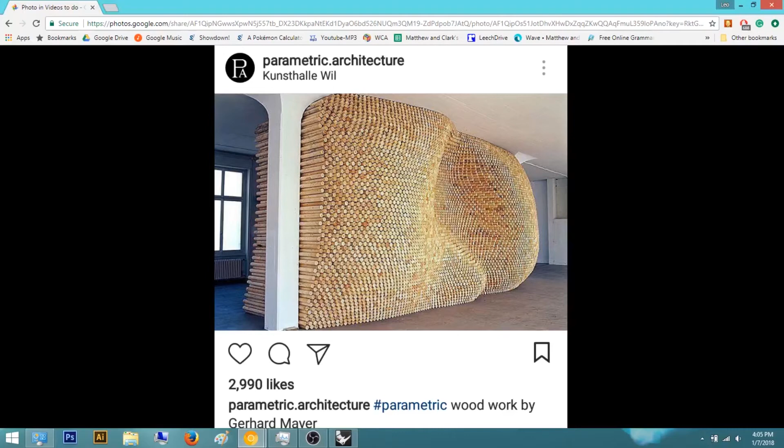Hey everyone, today we're going to do a video on this kind of parametric wall that someone's created out of these wooden poles. It's woodwork by Gerhard Mayer. Found it on this Instagram page, parametric.architecture.

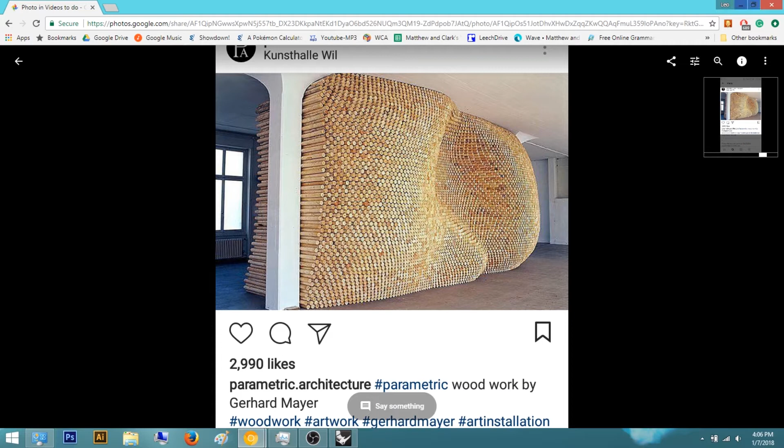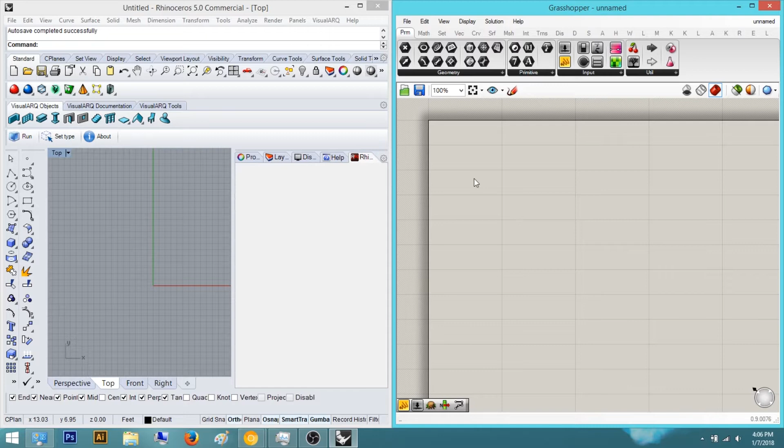I'm just going to move this to the side. I did make this a few hours ago, so I already attempted making it. I'm not going to repeat everything; I'm going to do some things a little differently because there were definitely some inefficiencies in the script that I made. So we're going to start with a square actually. I think that's the best idea.

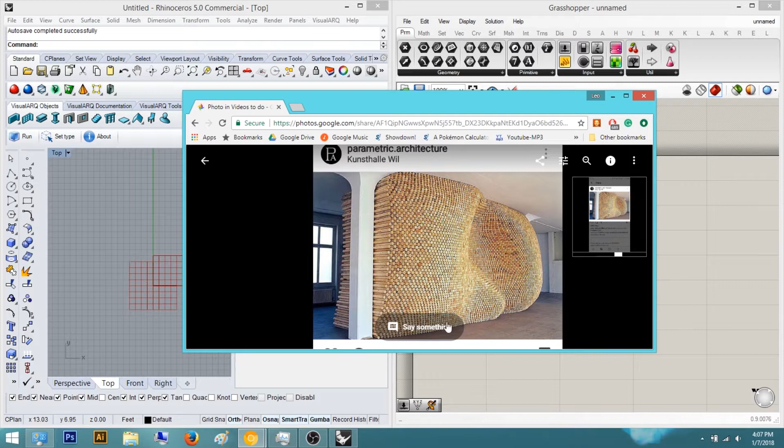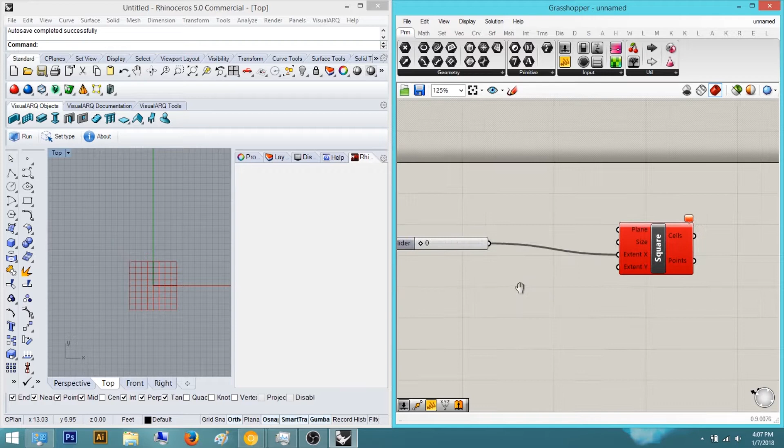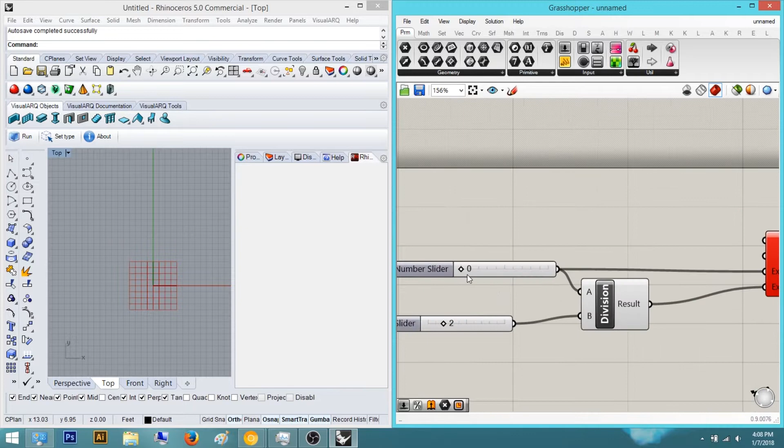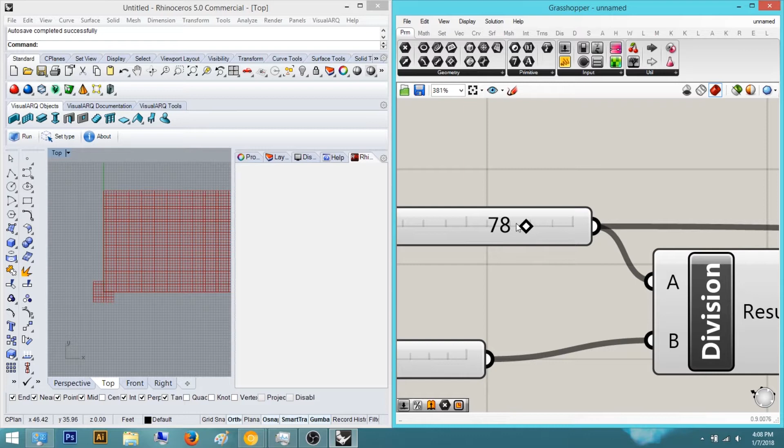That's fine. So all I do now is a division in order for this to always fit within this geometry. As you can see, it'll always be in that 1 to 2 proportion. I'm also going to keep this number even. Divide by 2. And this number has to be even as well. I'm actually going to keep it at 80. 80 is a good number, and that will create a steady amount of points.

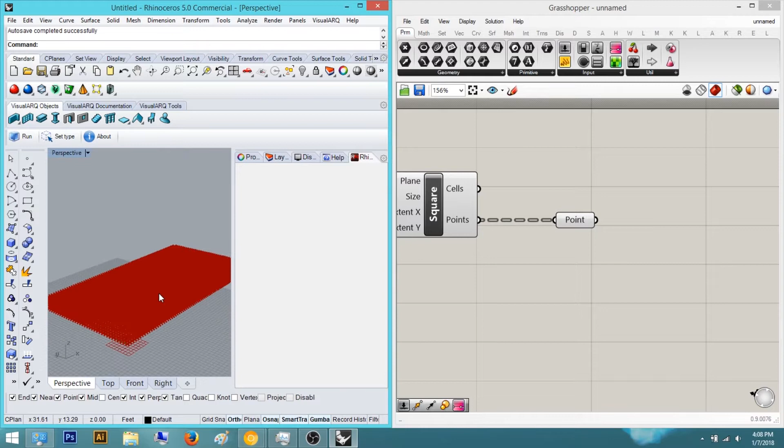So we can now type in points, and this will create a field of points. There already was a field of points, but now it's highlighted. So what we're going to do now is basically an attractor point. I know that I need to create at least 4 attractor points: one here, one here, one here, and one here. I'm going to start with this one, the one going in the negative direction in the XY coordinate.

So we'll just type in move. This is basically the attractor point lesson. Also, I learned that if you want to move something, you just hold Alt and click, and it'll separate it, which is pretty cool. So if I wanted more room here, I would do that. I want to move in the Z direction. I keep forgetting that I don't need to move it back, but I always do that out of habit. Then we're going to do a remap numbers.

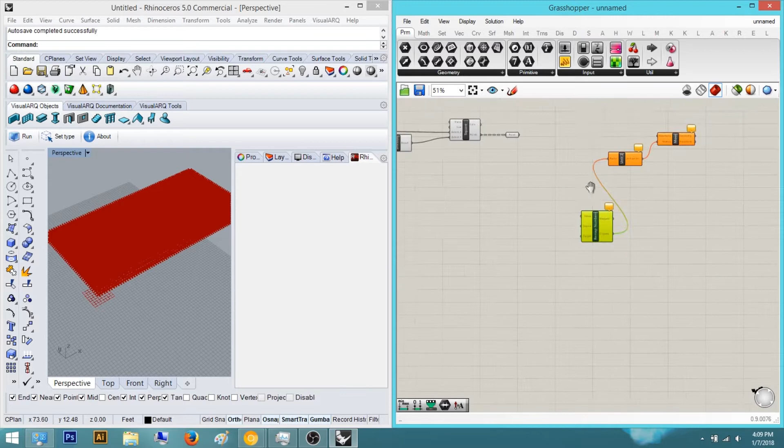I don't know why every time I'm about to record, I always have to clear my throat. It's really annoying. Obviously, I talk a lot.

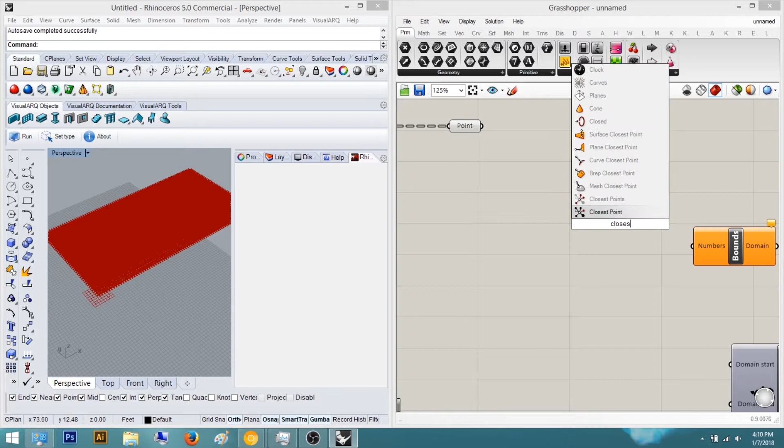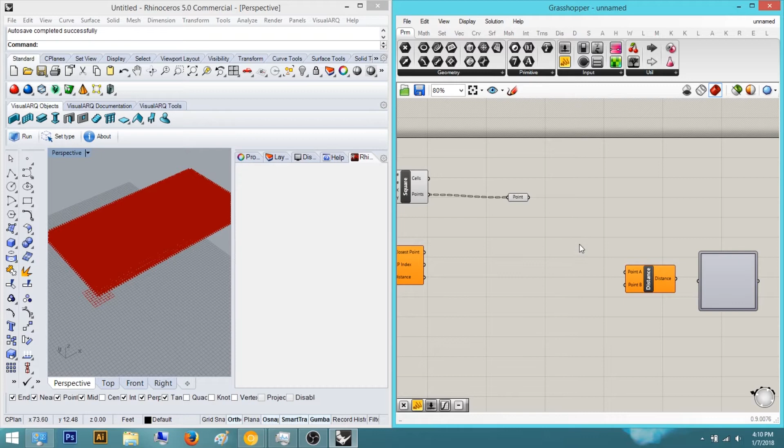So after you do remap numbers, just do the usual construct domain. Plug this in here, and do bounds. And then instead of closest point, we're actually going to use distance instead. But before we plug these in, in between these is going to be a graph mapper. We're actually going to utilize the graph mapper today since it will help us determine the intensity of the manipulation of the points. And you'll see what I mean in a second.

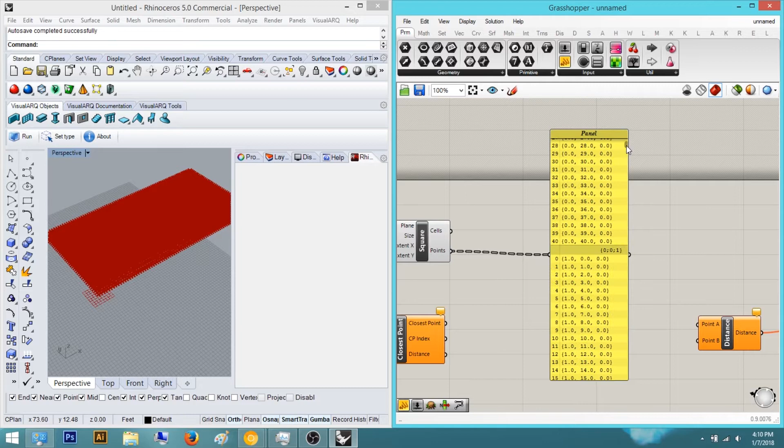So you just plug this in, and we just plug these two values in here, and it looks like that. Now if we throw a panel on here, you can see it has their own branches. So we want to flatten that so it doesn't redo the same command every time. So we're going to do a flatten here, and we're going to plug this into A. And then we're going to type in point here. Not point line, do point.

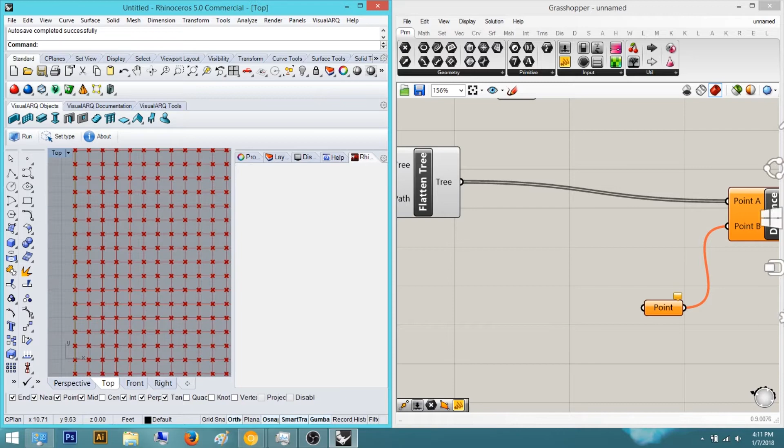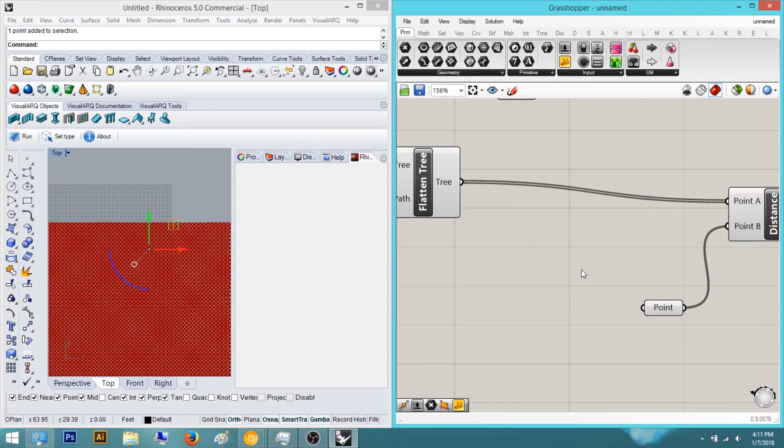And now we know that it's about here, so I'd say around, let me look at that picture again, somewhere here. So I'm just going to guesstimate exactly where it's at. So I go to point, have my point, and set 1 point, sweet. And now all I have to do is use this flattened point geometry. Actually, I'm going to hide this because I don't need it. And then plug it into geometry, and we'll see what it does.

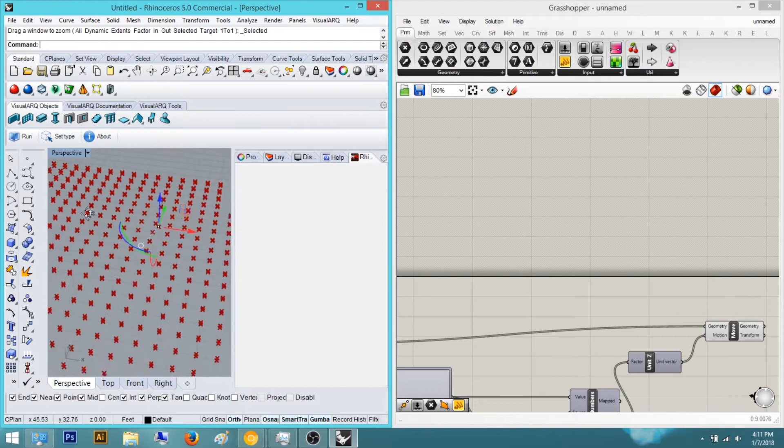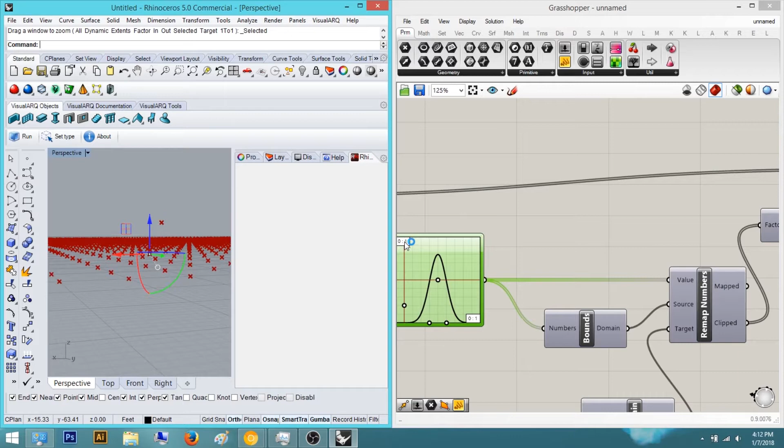Alright, so it looks like nothing is happening. Okay, it's lifted up a tiny bit. There is some difference, but there is no graph, so that's already a problem. We're going to use the Gaussian graph because that's kind of the articulation that's happening here. It has that little kind of hump going on here, or hill. I don't know how else to call it. So it is working because there is 1 point moving. Right now it's at a 1-to-1 scale, so of course it's only going to move 1 point.

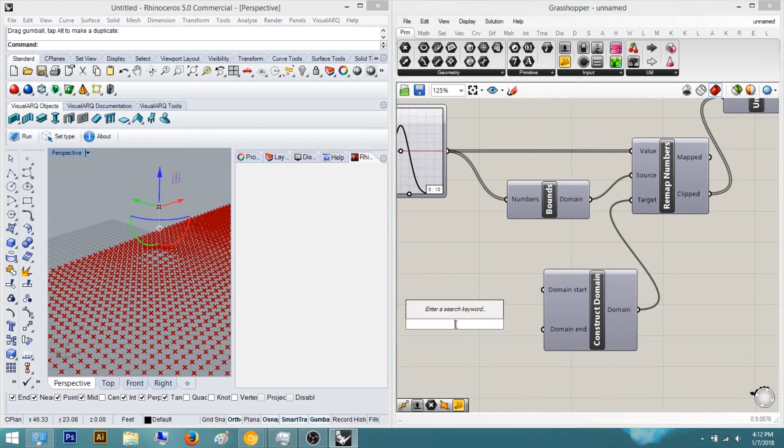So let's just try 10 and see how that works out. And 10 seems to be pretty nice. I think 10 is a good number for these things. Oh, I didn't do up. That's what I want to do. So right now the domain is only up to 1 at its highest. So I'm going to change that to be 0, just for the sake of understanding that, and do a negative here because I want it to recess into that piece. And I'm going to do 7. Let's try that.

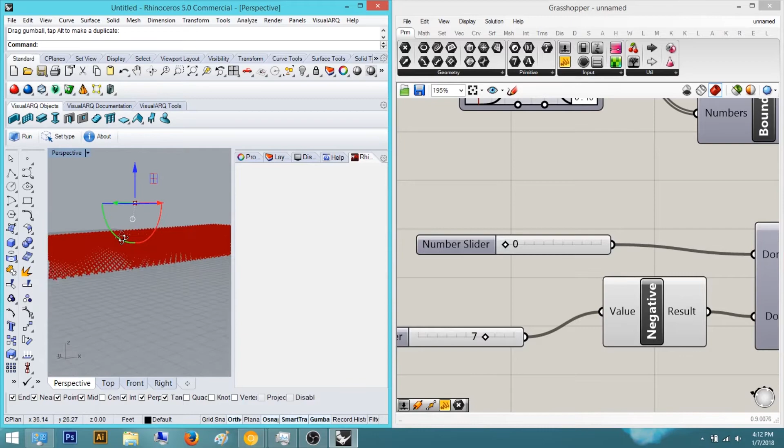Okay, so that's kind of the depth I want, but it's way too sharp. As you can see, it just falls right into that kind of pit. So let's actually start to widen that out. Let's go here and a little bit here. As you can see, in this one, it has it kind of going out. Of course, there is a little divot here, so I'm actually going to move it a little bit, and that's definitely something I'm looking for. Awesome. A little more. Yeah, a little bit back. All right, cool. That's definitely something I'm looking for right here.

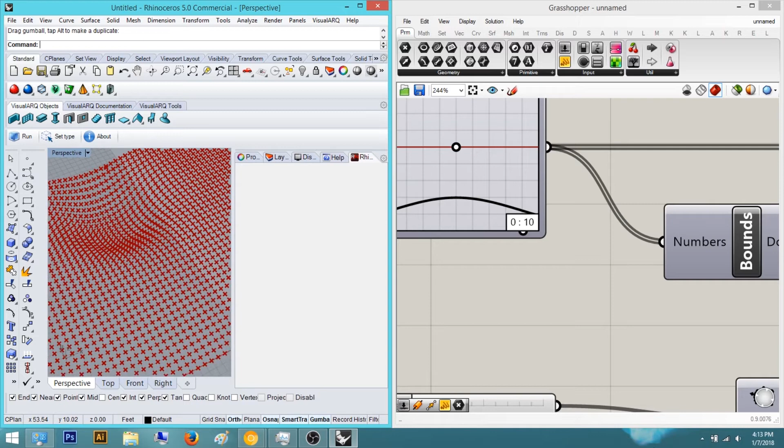And then, where's my image at? So I need that to kind of wind up. Okay, this is a pretty good start. I want to expand it a little bit. I don't want it to be just 10, so I'm going to change it to 15 actually. It'll widen out a little bit, and now I can actually move it back a little bit. There we go, something like that. All right, cool. Because this is going to be the biggest type of articulation. Maybe not that wide.

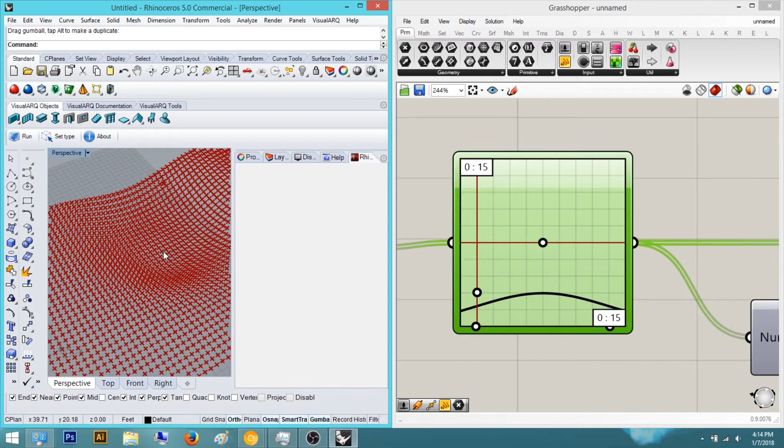It looks pretty deep in here. I'm trying to make it somewhat accurate to this. So now once we have that, I'm going to actually create these 3 points. These 3 points are positive, kind of pulling up the points instead of pushing down the points. And this seems to be good. All right, cool. So let's start with the next ones.

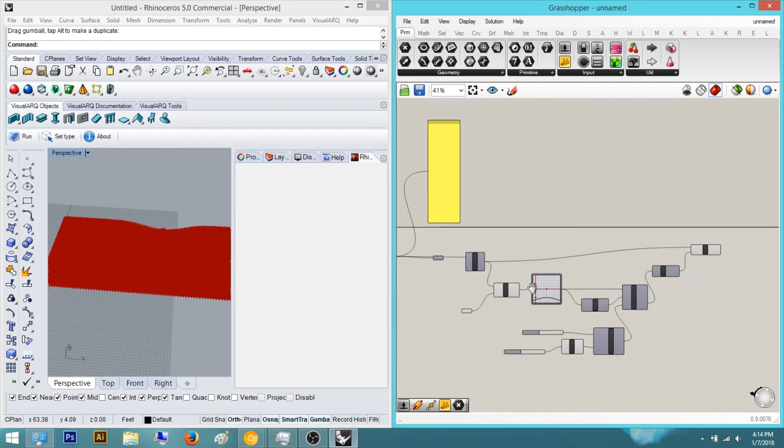And if you're learning, I'd recommend typing it all. So for the second one, I'm actually going to type it all instead of copying and pasting. But for the other 3 that are left, I am going to copy and paste. So I'm going to redo that. I'm just going to do a move. I'm actually going to hide this because I know what it does. Hide. We'll just do Z direction because that's the direction we want in.

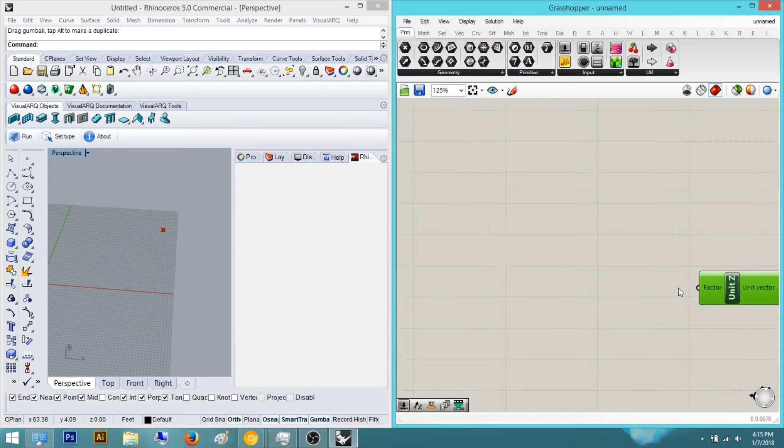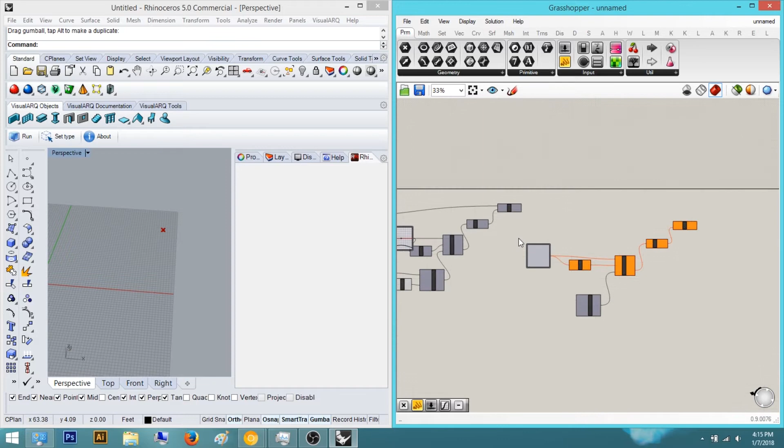We'll do a remap numbers. I'm just going to quickly go over it since we already went over it. Construct domain. Bounds. We'll do, not construct domain, what is it called? Graph mapper. Put these bad boys in. I always have a hard time grabbing onto these for some reason. We'll just expand this out. Well, not that much, probably just a little bit. And then we'll do a distance.

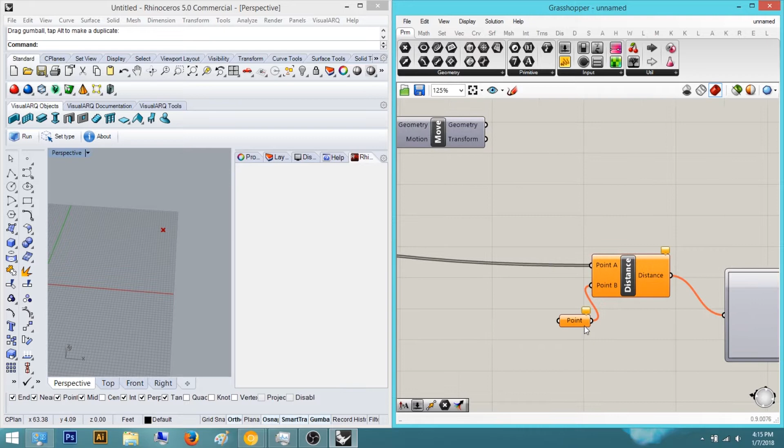And again, when we do the distance, point A is going to be the exact same. So whatever this point A is at is going to be on this flattened tree. And then we're going to do point. And now we know that this is going to be 0 and this is going to be 7 or something like that. It doesn't have to be exactly 7. And we know the graph that we want is a type of Gaussian graph. It's leaking onto my second screen. So Gaussian. And now we can do top.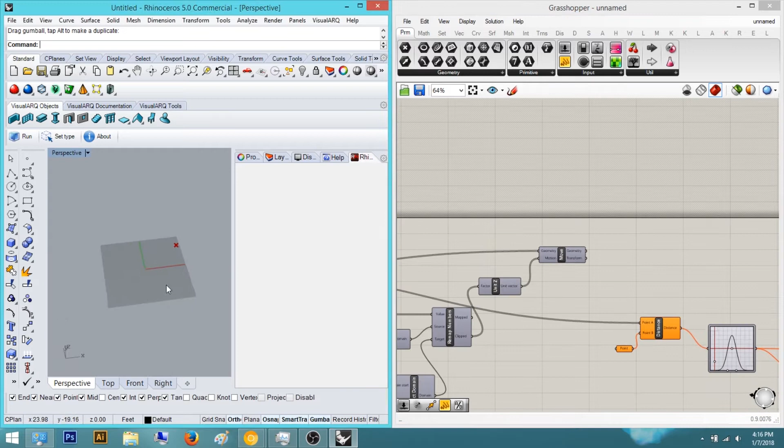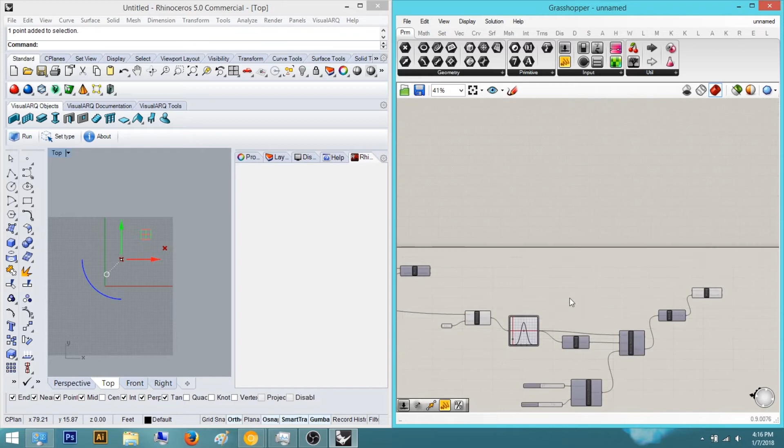And I know it's somewhere around here. Let me turn this back on again. Yeah, it's somewhere around here. So I'm going to put that. And now I can see my point, and I'm going to right click, set one point, and now we have our point done. Alright, so all we have to do now is just plug this in. Nice. And as you can see, it is working to an extent. It's only moving that 1 point, or 2 points. It's not moving that much. So we can set this to 10 again, instead of 15, like I've been doing. So let's try that out.

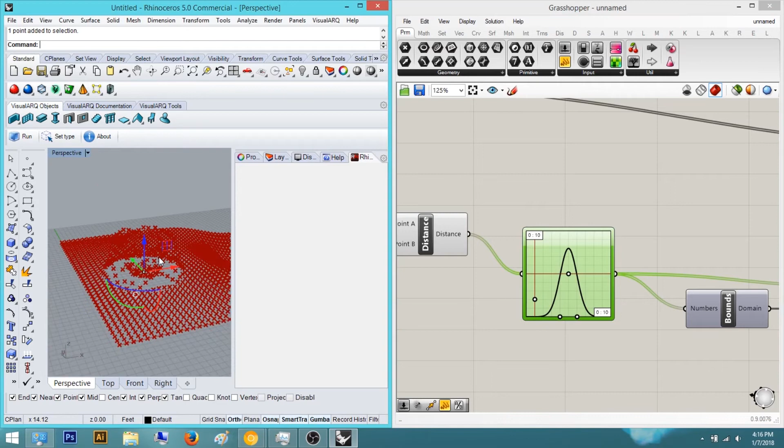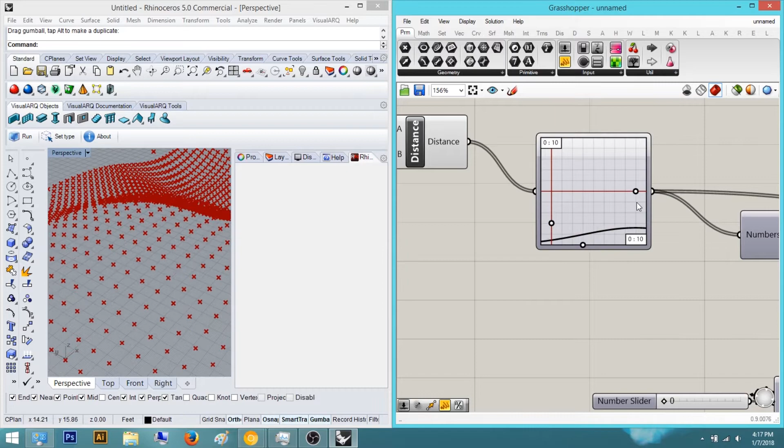Okay. Awesome. So now we can actually start to articulate these points. Let me see what these look like. It's a very slight bump, so I'm definitely not going to make it this severe. I'm just going to move it around a little bit. Sorry, it's a little hard to see with all of these points here, so I'm just trying to find the easiest way to do this. That's a little high up. I don't want it that high. I want it really light, so I'm going to go over the boundaries and do something like 25.

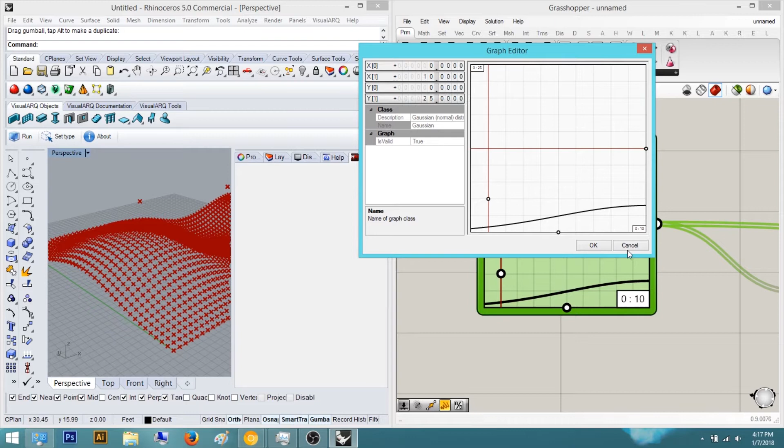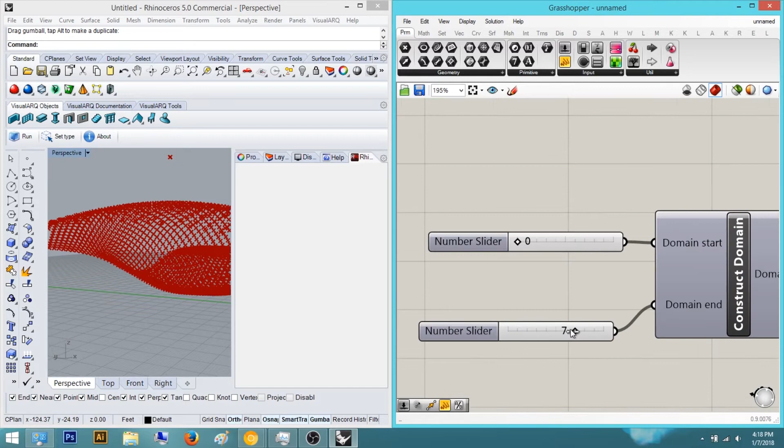Wait, what direction is this in? The X direction. I want it in the Y direction to be very subtle, so I'm going to do 25 on the Y direction. Let me change the other one too. Okay, that actually seems to work. Just very slight, but I'm also going to lower the movement of the points to not be so high up. I just want it to be very subtle. Nothing too severe. There we go. Something like that. That seems to work out quite well. Alright. So now we have to do the next point.

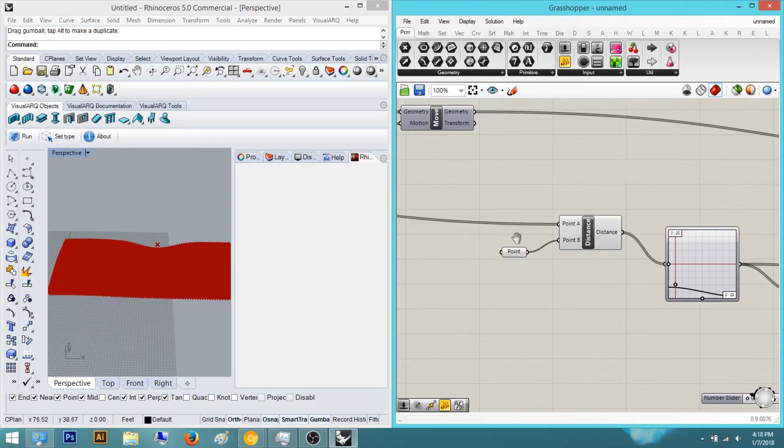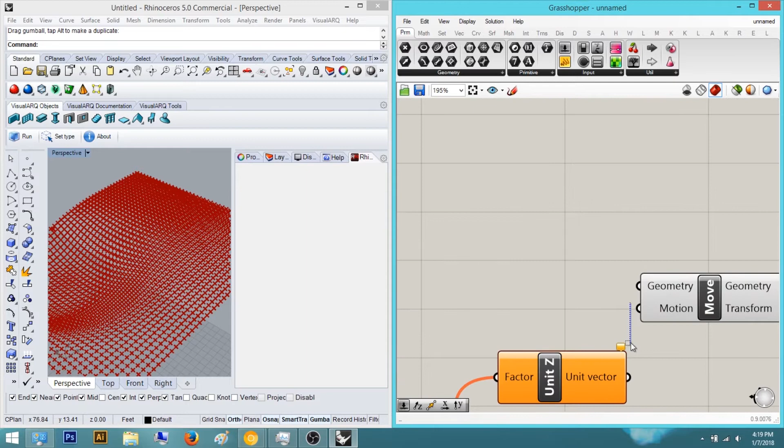We have 2 points done, and we need to do this one right here, and this one right here. So all I do is copy, Control C, V, copy and paste this, and I'm going to delete that point. And I'm also going to copy and paste this one. And do a move. I'm just going to plug in a move to each one already, to the motion. And I'm going to align these moves up. Boom. Awesome, now they're all aligned. You see the script is getting quite long, but it's not going to get much longer than this. So we'll type in point,

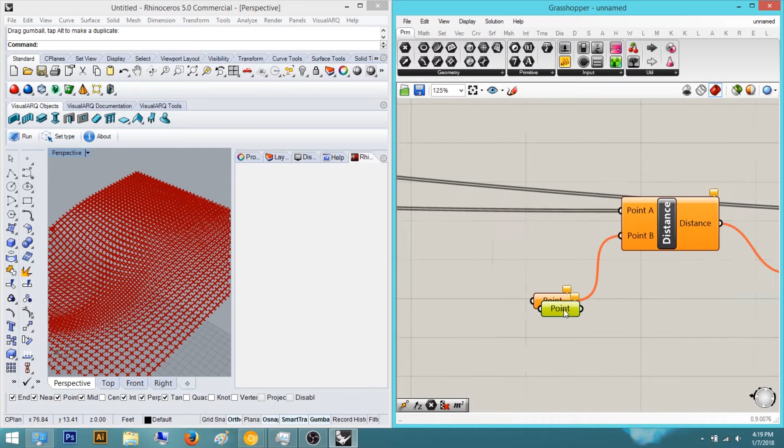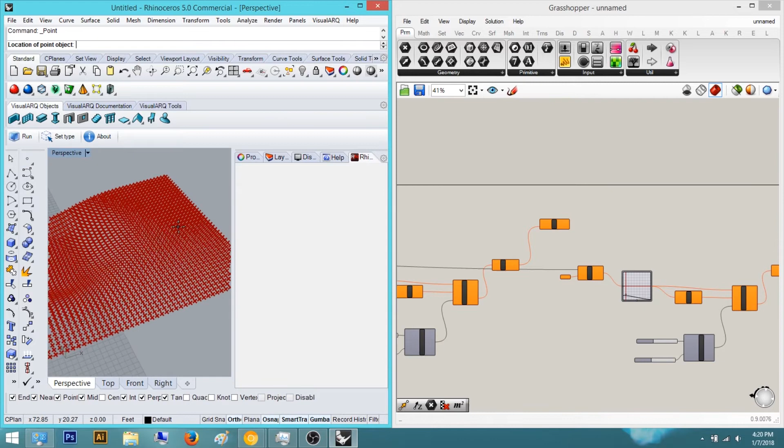and then we'll move this one here. And then all we're going to do now is just use probably here. I'm going to make it exactly parallel with this, so I'm going to do a move command in Rhino and line it up exactly with that. And then somewhere here. So we're going to start with this one. Where is my graph at? It is right here. And I'm not going to make it all the way here, so this is not going to be 25, it's only going to be 10. You only need that much, you don't need large numbers. 10.

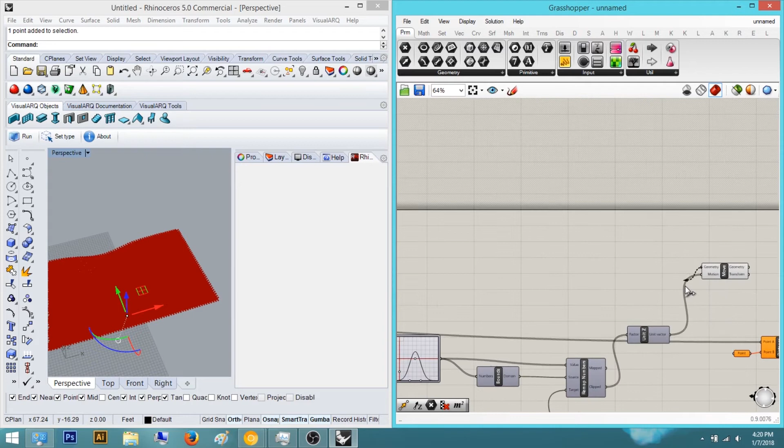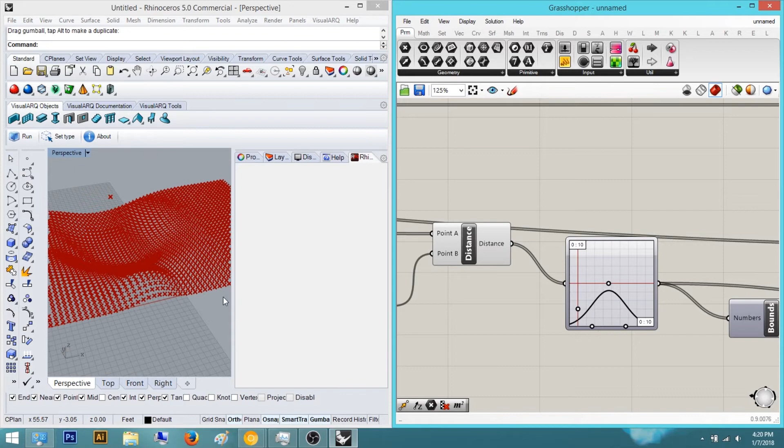Awesome. So now we have that type of sharp geometry going on. I want it a little bit more severe actually. So I'm actually going to do something like that, but turn up the height, something like that. Yep. All right, and it should match something along the lines of that. Cool. All right, it's doing it quite well.

Sorry if you hear all my click noise. This is just how I model. I know a lot of people don't like it, but that's the nature of modeling in general.

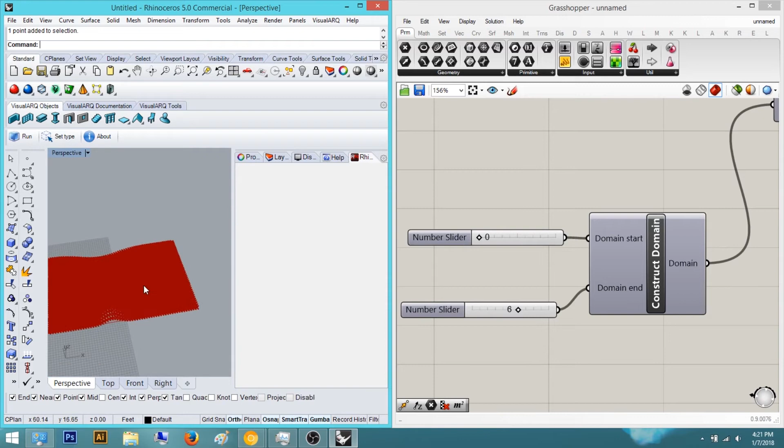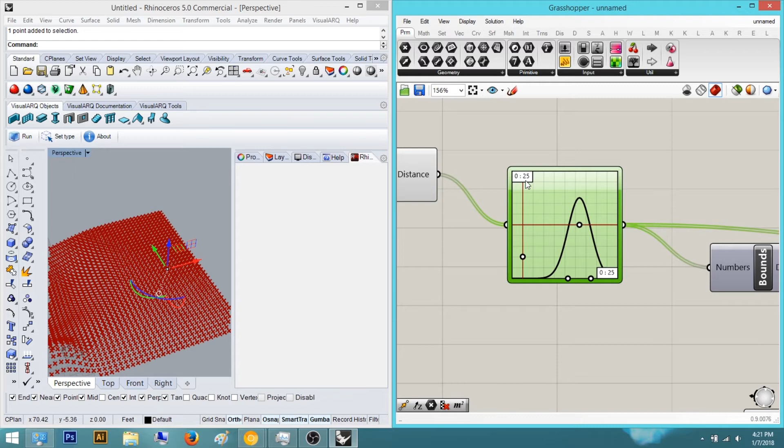So this last point, I'm going to set one point here, and then kind of move this back here. Now I only want this direction to be affected, which is the y direction. So I'm going to keep the y direction at 25, but I'm going to go back and put this at 10, so it only affects a rectangular area. And now all we have to do is plug this in and hide this.

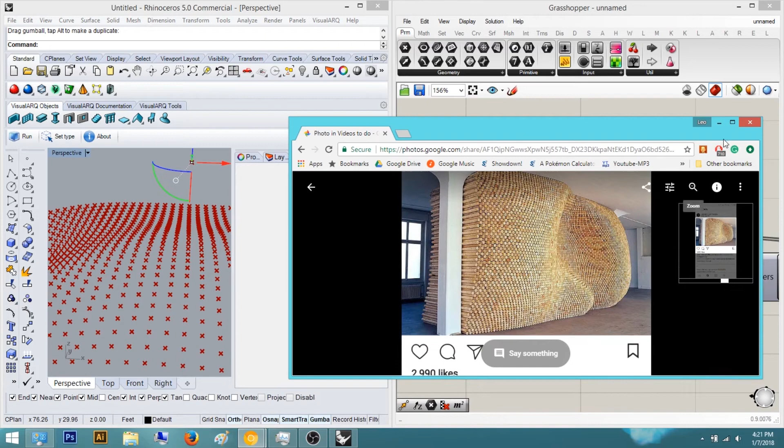Alright, and now we're going to do what we did with that other one and sort of flatten that out. But it seems to be a bit more severe than that from what I've seen. Like right here, it's very bulged out. So I'm definitely changing the parameters of this to be a little bit bigger. Let me see if I can actually start to move this down. That actually sags it versus that.

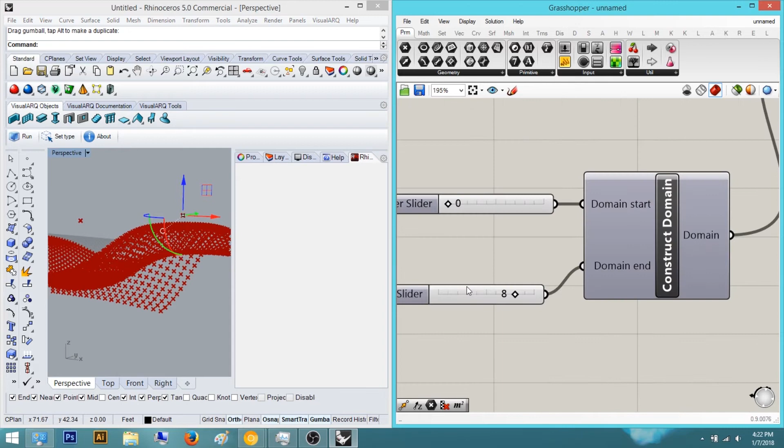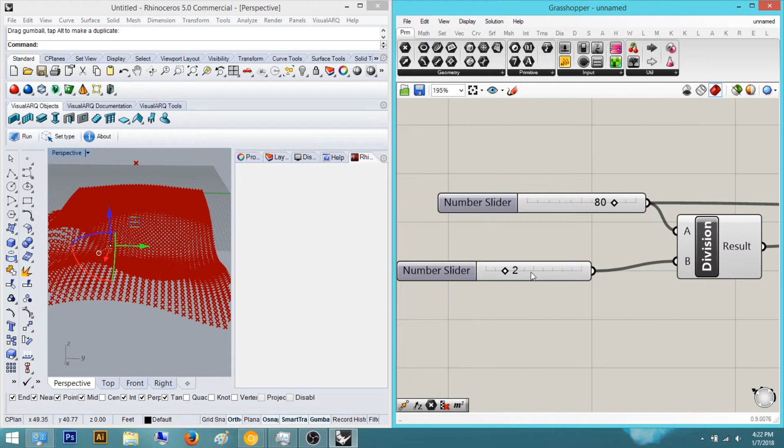Maybe not that high. I'm actually going to use rational to get a more accurate way of doing it. Yep, that looks really good. All right, nice. I want to capture more of the 25, so let's say 50. Actually, how much is in the y direction? 40. Not this one.

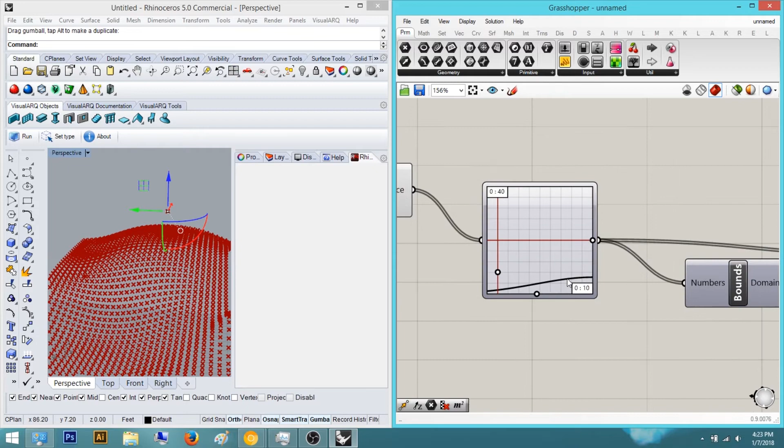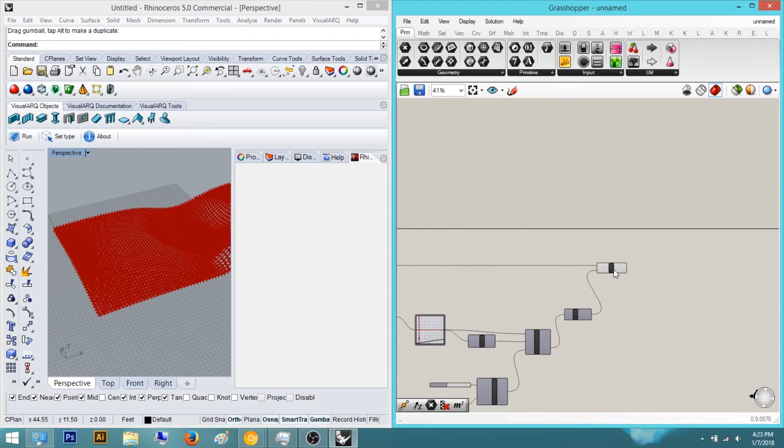I need this to extend out a little bit more, but I think this is really good for what I have right now. It's pretty accurate in terms of the shape. So now we have the form with the amount of points done. We manipulate the geometry by using points. Once you have that, we can start to make the poles. And the way to create that checkered pattern is like we did in the parametric brick wall. We can do a cull pattern.

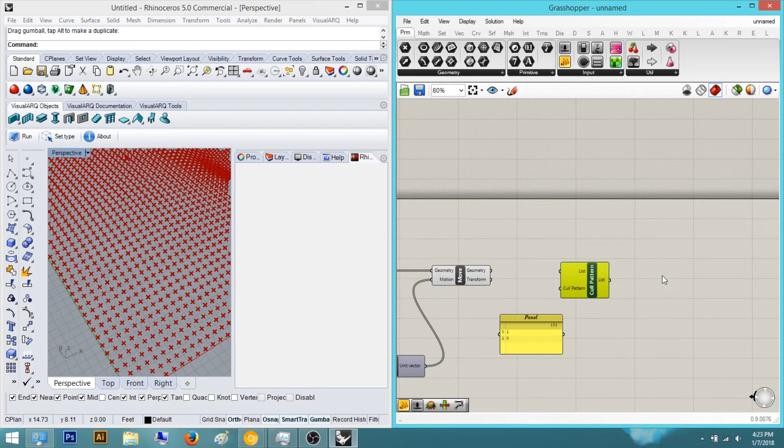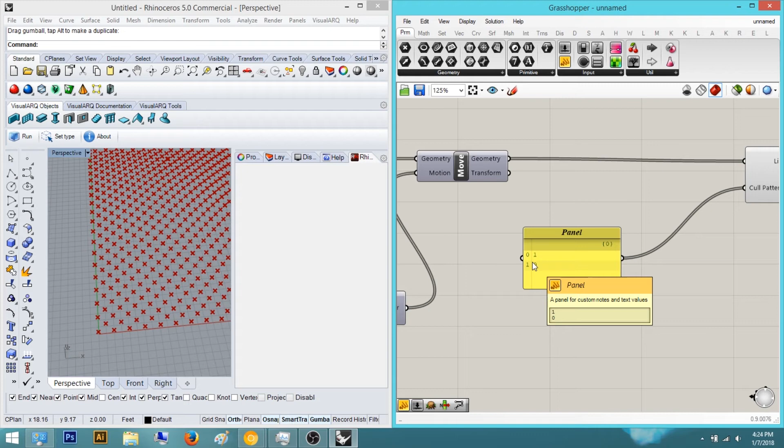Panel, double click, 1, 0, press OK, multi-line data, list, and hide this. And as you see, we have our checkerboard list manipulation happening. If you don't understand what 1 and 0 is, you need to go back to a list manipulation tutorial, not necessarily mine, but someone else's as well, if that helps you out. But as a brief overview, 1 is true and 0 is false. So 1, 0, 1, 0.

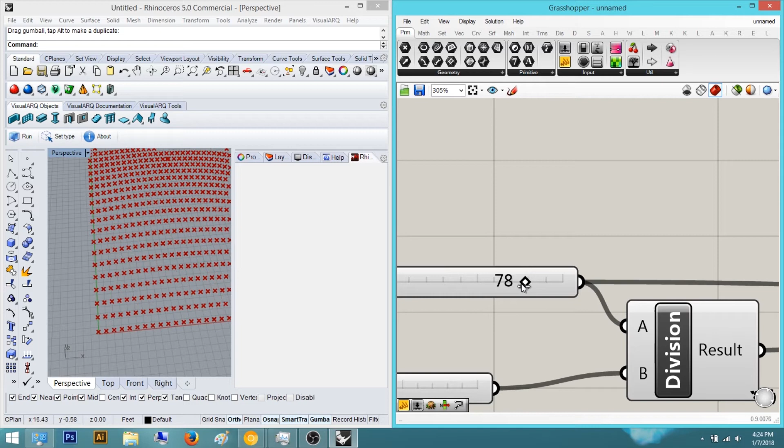And the reason why I kept this at an even number is because this needs to be even always, and so does y, in order to create that checkered pattern, because of the listing. If it lists in odd numbers, it'll just show lines of geometry, and I'll show you that right now. So 78 is an even number, but 78 divided by 2 is 39, so it creates an odd number here, and you have these lines instead. So we're going to do 80, awesome.

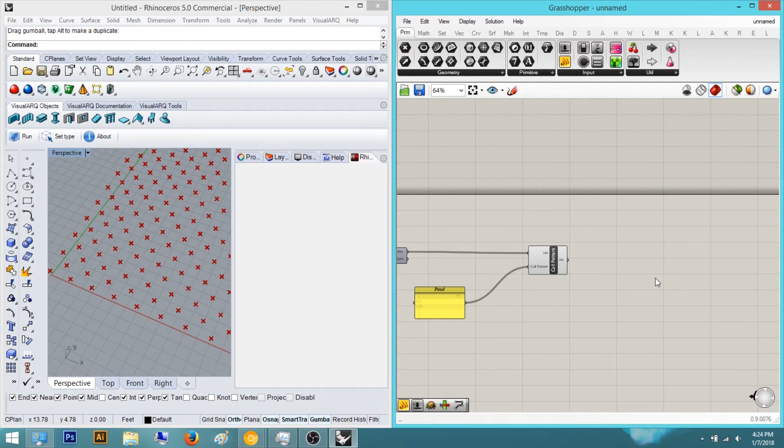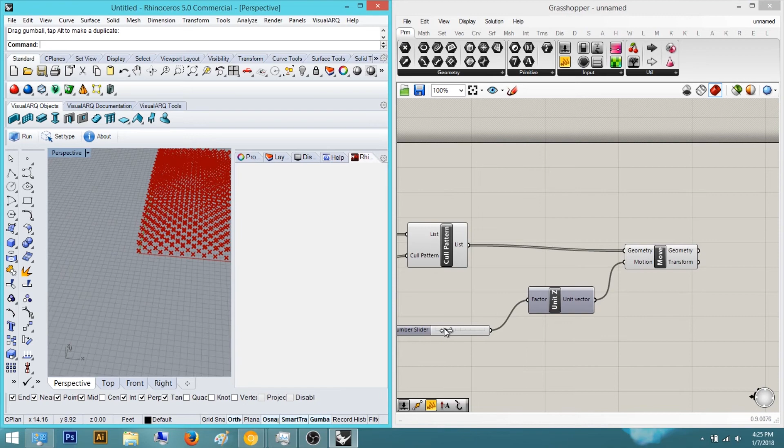Alright, so now that we have that, I'm actually going to move this in the Z direction, and I'm just going to plug in a slider into the Z. Awesome. So now we can actually start to manipulate the geometry on how it's moved. So I'm going to say all the way to 10. And that should be good.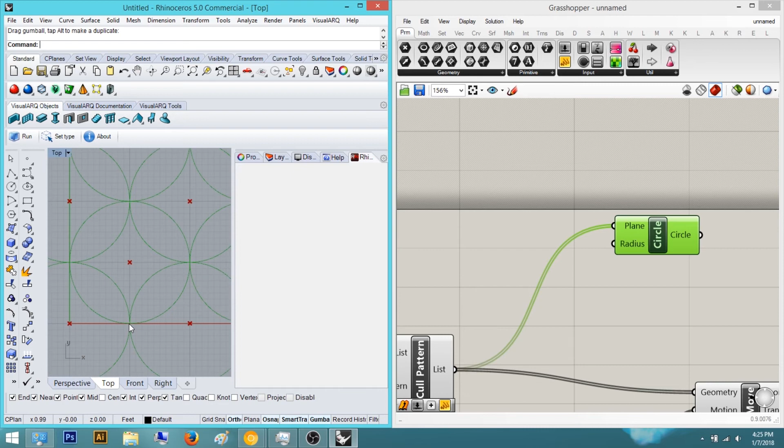Sweet. Once we have that, we're going to now go back to this cull pattern and make circles now, which will serve as our metal poles. Now in top view, you see that they're intersecting a little bit. Here they're intersecting. Okay, let me think. If this reaches that, this reaches that perfectly. Let's try 0.5.

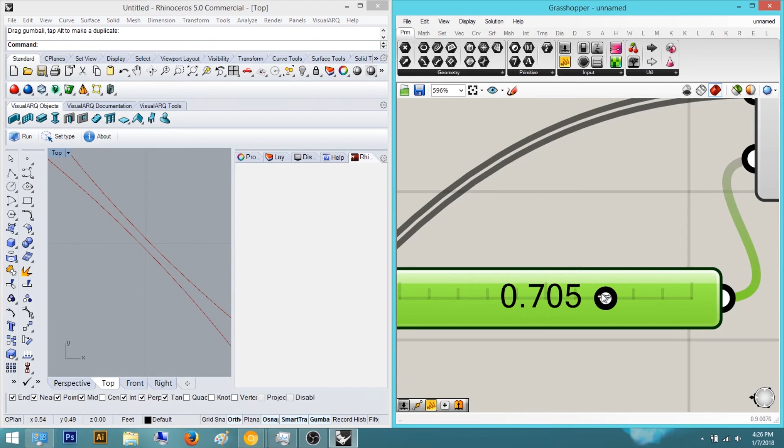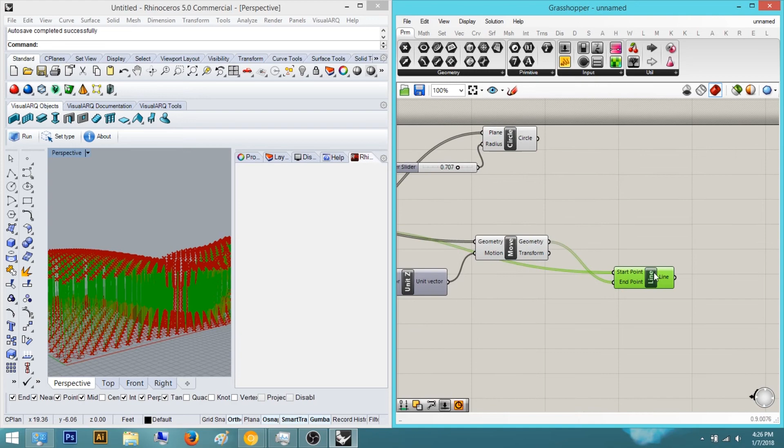So we have our cull pattern, bottom. So this will be our start point versus our end point. And you can see we have an array of lines. Oh no. Alright, so now we have an array of lines. We can actually start to create the poles now, which we have with the circles.

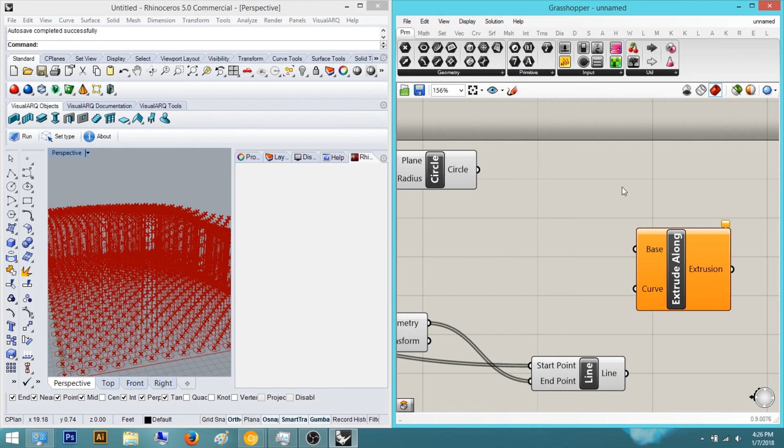And we can actually use something we never used before in this tutorial, which will be the extrude along component. So this extrude along component is basically how we can show our points. So how we can extrude the exact distance of these lines. So these lines have a certain distance, right? It's exactly 10 feet actually, but it's 10 feet in a direction of these lines.

So it's not starting from like a flat area. So it's not like attractor point based. The extrusions are not attractor point based. It's more of the movement of the points that are attractor point based.

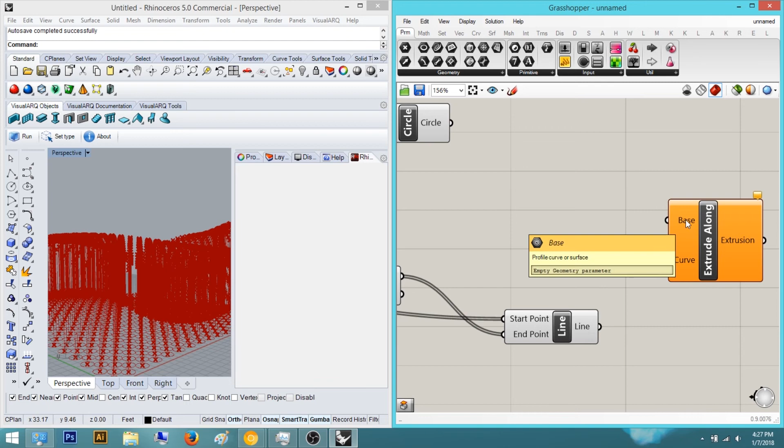So knowing that, we are going to now go to circle, and we want to know it has base and curve. And the base is basically what you're trying to extrude, so we can actually go here and we can put what you are trying to extrude. And the curve is basically

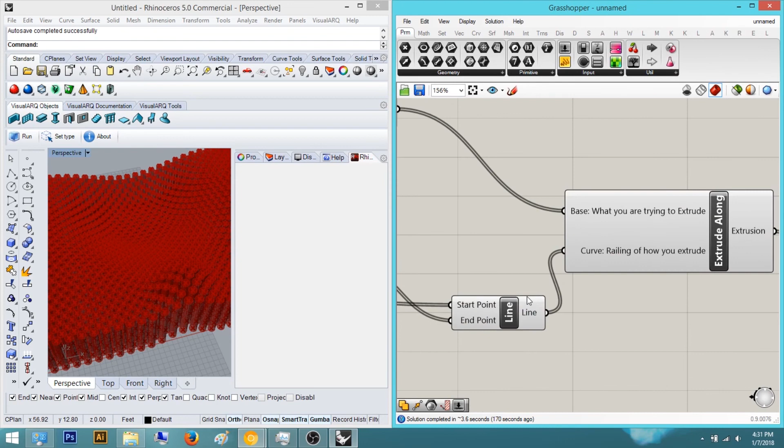Alright, sorry about that, guys. My film cut out for some reason, and I didn't want to start all the way over on this one because I had all this already done, and I didn't want to redo the geometry since I already had it done here.

But anyways, I was saying that base is basically what you're trying to extrude from, and the curve is the railing of how you extrude. So this is the line component, and the railing how you extrude versus the base on what you're trying to extrude here.

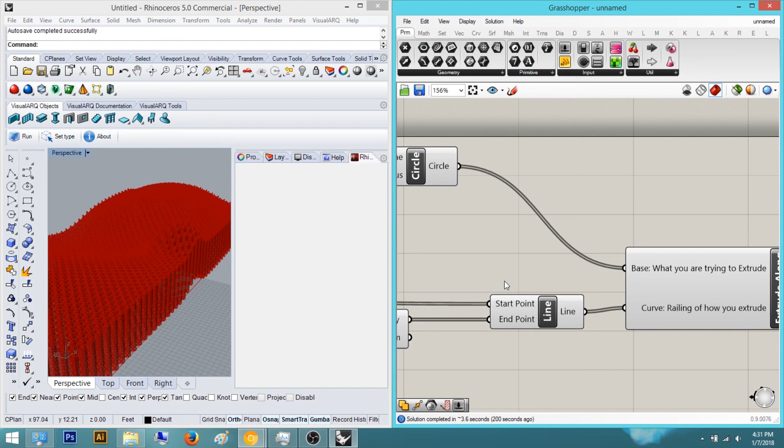So yeah, I apologize, guys. I don't know why my OBS is acting really funny right now. It just randomly cut off, and I have no idea why. I think I accidentally turned on my start and stop component of the record button, and I think it's like Shift R or something. Maybe I pressed that by accident.

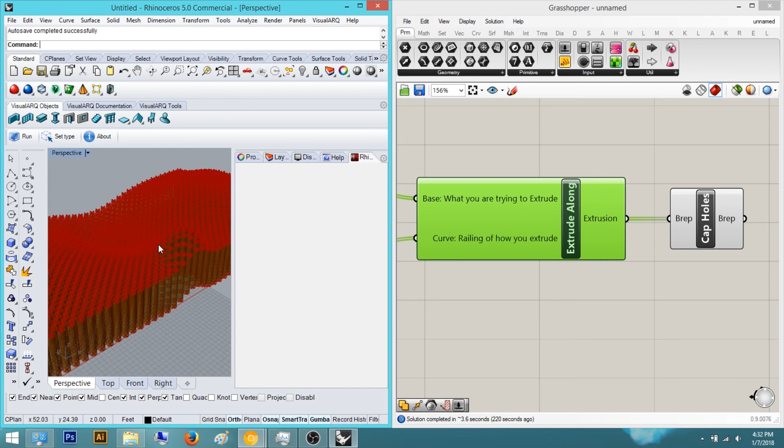I'm not too sure. So yeah, I don't know why that happened, but anyways, all I did here was did the extrude along, and it created this. And then I have the cap holes here. So I capped the holes, and all I said now is I'm just going to bake this, so we're caught up to speed. So I baked it, and we're actually going to put this on a shaded view so we can see what's going on. Let it process the geometry.

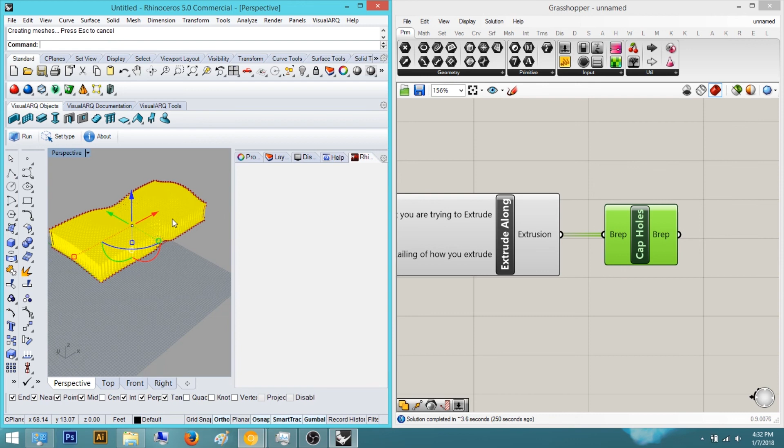Alright, cool. And right now they're all grouped, so I don't have to worry about anything. Let me just move this out of the way and rotate this way. So yeah, that's what it looks like. Obviously there's probably more geometry, but I don't think my computer could have handled it, so I decided not to do that. But yeah, that's pretty much it, guys.

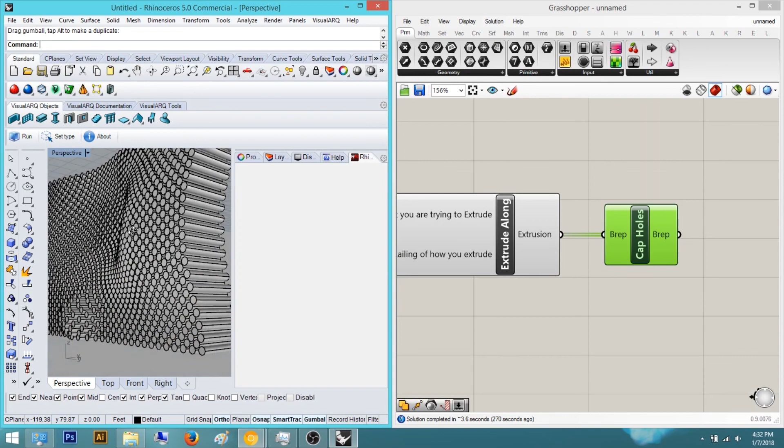This is the parametric wall of wooden poles. So yeah, guys, let me pull it up real quick. So yeah, this is it. You see in comparison, it's a little different. You can also do this. It doesn't have to be exactly this, but it's definitely something that will help you out in the future in terms of how you would extrude or make a wall that's parametric and things like that. So yeah, guys, just want to show you this.